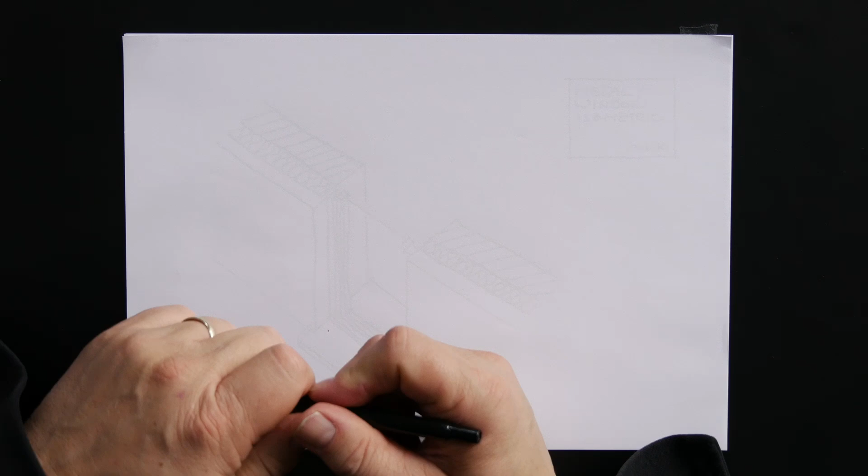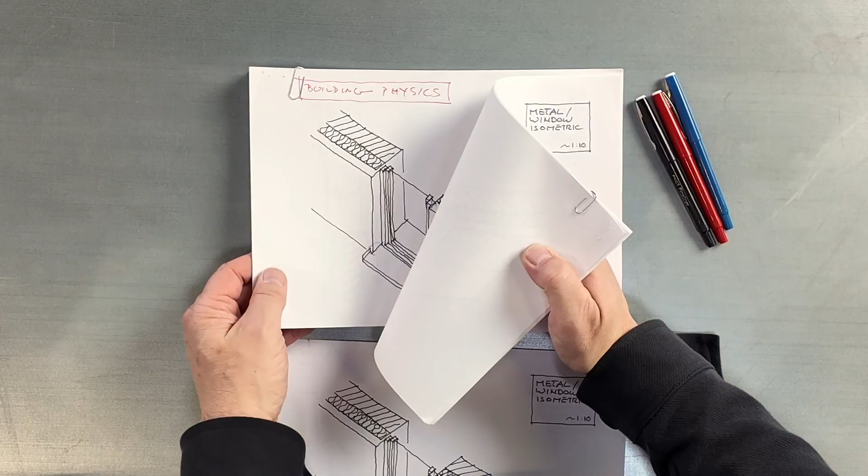So, what do we do now? I talked to all the specialists I wanted to talk to. I talked to a structural design specialist, Ornella in Milano. I talked to a building physics specialist, Enrico, also in Milano. I talked to Jochen for maintenance, and also to Jochen as a construction company boss for construction comments on site construction. And now what do we do with that?

Now I take all this information and feed it into my details to make them the final setup. This is the last feedback in principle. This will become now the final set of drawings, where we have all the impact, the feedback and comments. That's what we then take for someone to go out for tender.

So I just go into it - there was not a lot of comments from Ornella on the structural design. It's actually not that complex. She was okay with the tolerances. That's the different materials which we see, the aluminum system.

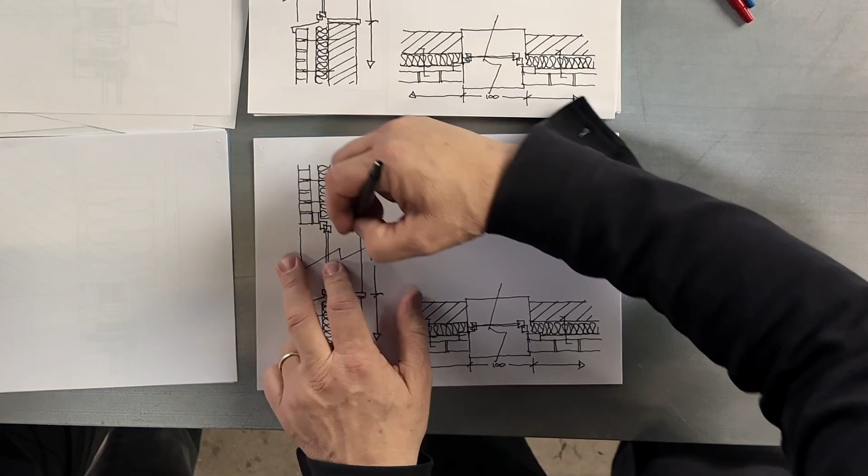Here's something - this is when we come to the brick structure. Here she commented, and she's right: as you're dealing with facades, the brick itself is also a cladding, so that needs somehow to be taken as a load.

Stupid for me, I have made these details several times - as you're a bricklayer, you should have commented. So what you actually have is a metal railing, sort of, on which you place the first layer of stone. It's also a difficult one because with the mortar and the metal it doesn't work well.

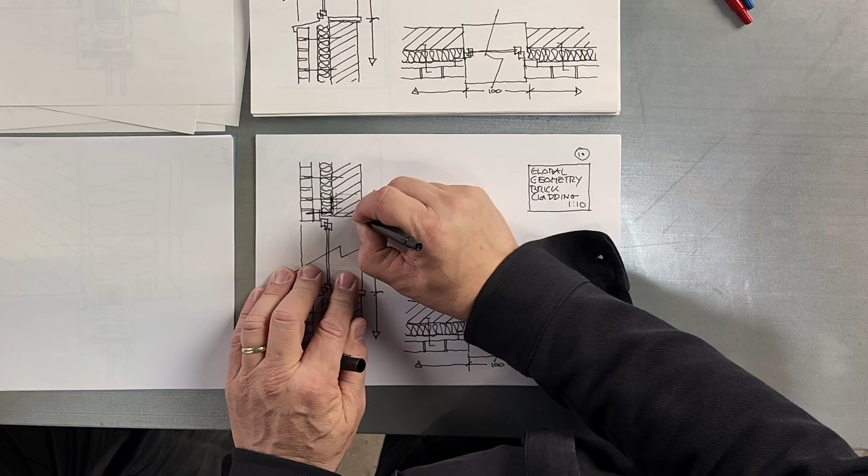If we believe this is brickwork as well, we may need to have some kind of concrete beam here to take the loads. Not part of our facade engineering, but well, she commented on that as a structural engineer. I continue with this - she was okay with this. The number was okay, and no further comments on these settings as well.

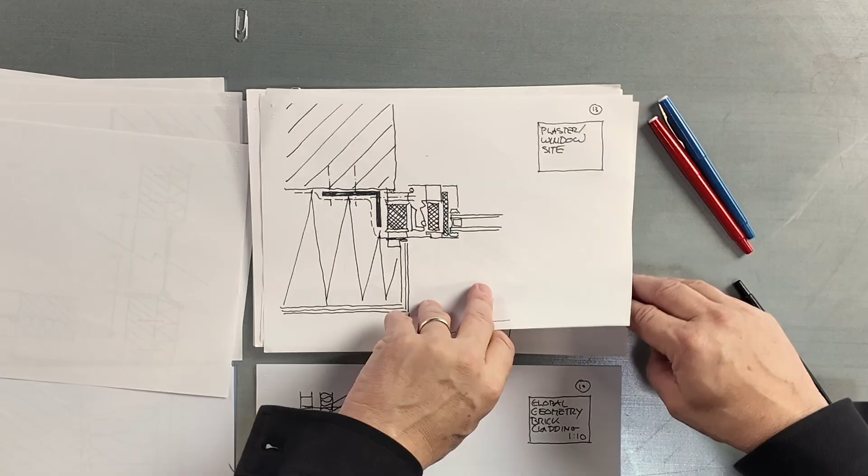That was an easy one for me. Then building physics - Enrico was actually super happy that we do these drawings and that we do this kind of education program, because he really sees that this is a benefit.

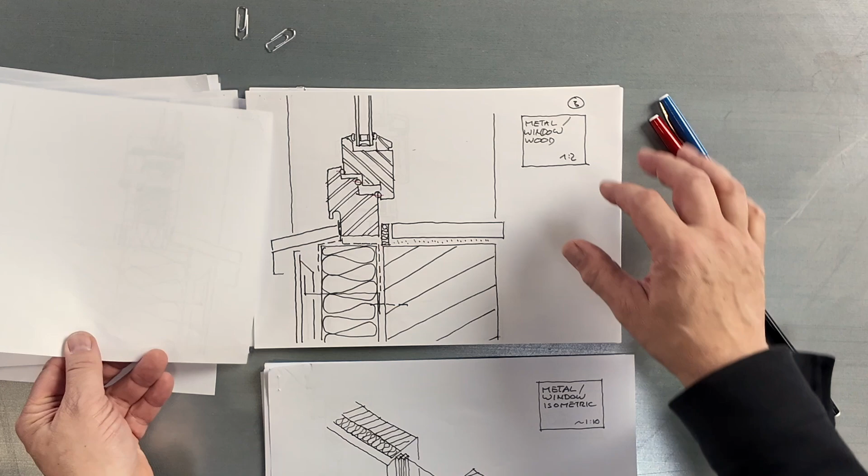When I went with him through all the details, he was evaluating - okay, you have these two gaskets, putting more like sealant, not three layers of gasket. We didn't do anything wrong. No, he was happy with this one, as I say, a pressure cavity which then allows drainage here. That was fine as well. The layer of the line of defenses, all okay.

Tolerances, not only in one but also in the other direction, which was fine for him. And this one, yeah.

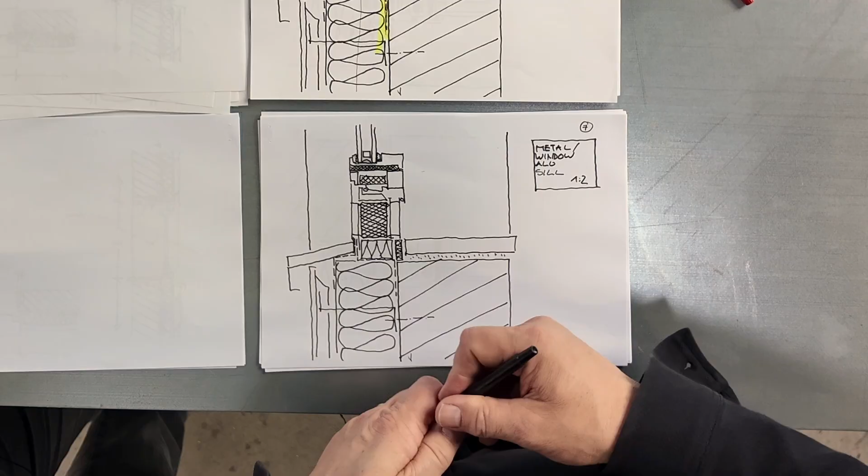Totally wrong - no, looks worse than it ended up being in the discussion. He was happy to have this kind of situation, making sure that we have kind of a cover for the water at the outside, line of defense on the inside as well. He wanted this to be sealed here, so he said you should take care of this. We're going to see a detailed solution later for that, and he wanted to make sure that we close all cavities so that it is closed in that cavity as well.

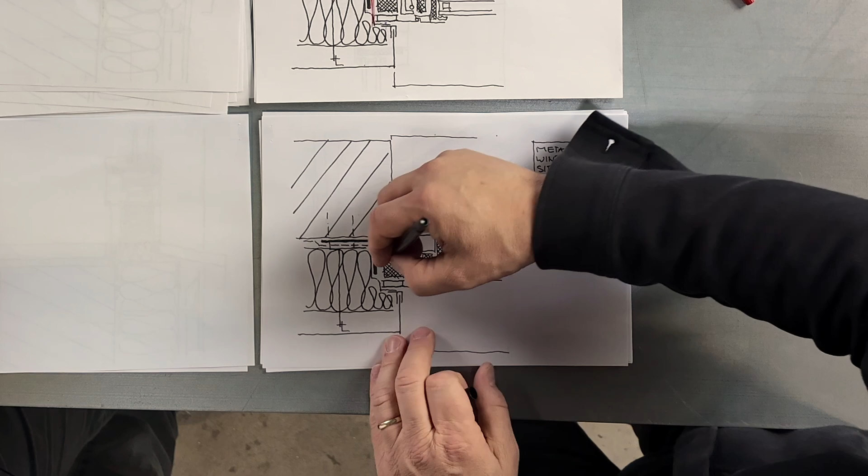That was quite clear from him, and even here - you often intentionally make a little bit more space in between. He was sketching, saying you have to really make sure that this is sealed, so you better draw it in this situation. No miscommunication in this case - it's also fine in here. I understand his point.

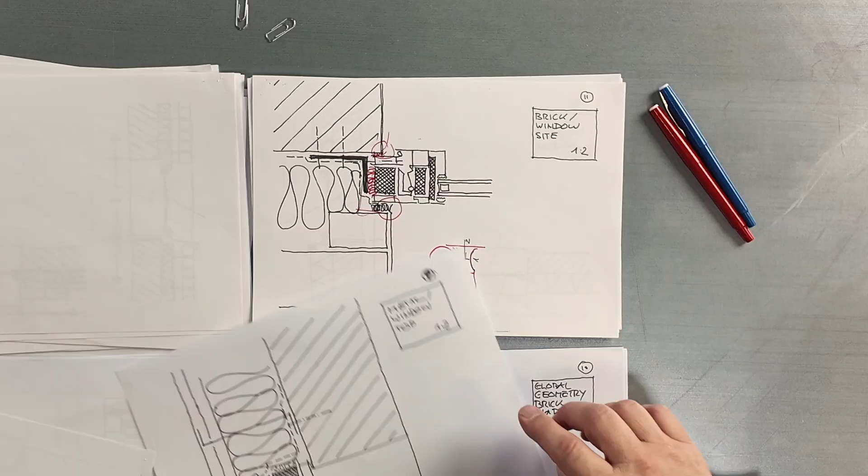Enrico was happy to have that sealant here in this situation, and with the others - this one was an interesting one. Is that the silicon joint? Yes, that's a silicon joint.

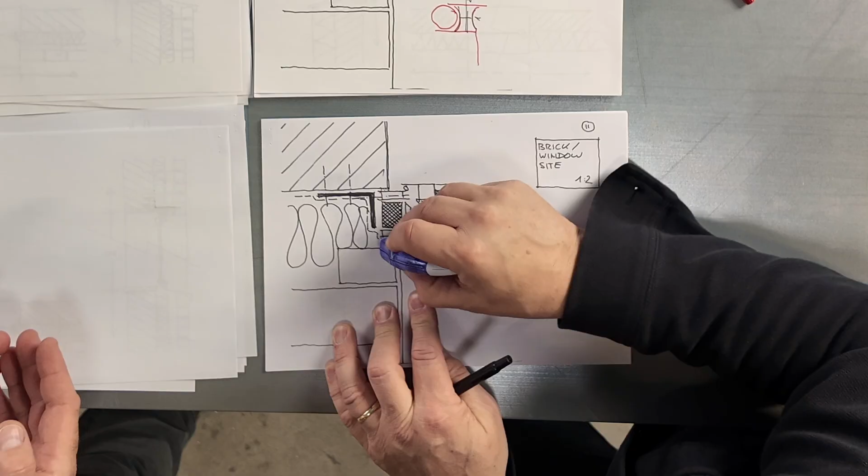Dreiflankenhaftung in Germany - silicon joints are used, or supposed to be used, only moving in one direction. So if the silicon also sticks to the back of the gap, then it can't work properly. So I'm going to draw this silicon cord here, and there's a little foam backing. And by this, I hope we are fine with having this solved.

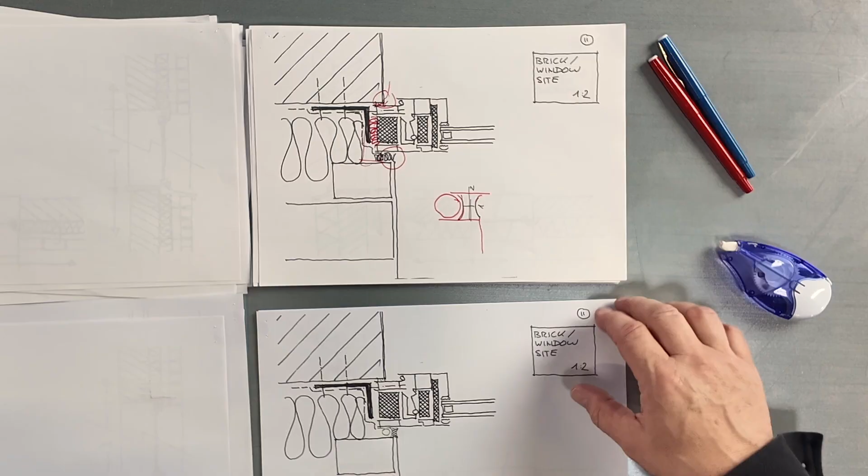That was a good comment. He's right - one part bonds to two parts, so that the silicon itself doesn't create too much stress.

It's also in the description of the silicon bead material that they tell you that you have to do this the right way. This one was mainly a comment: take care if you have these sharp edges that it doesn't get too serious. What I've learned also that usually... Hang on. Let's do that on the proper detail. Okay. Let's do that on the detail here.

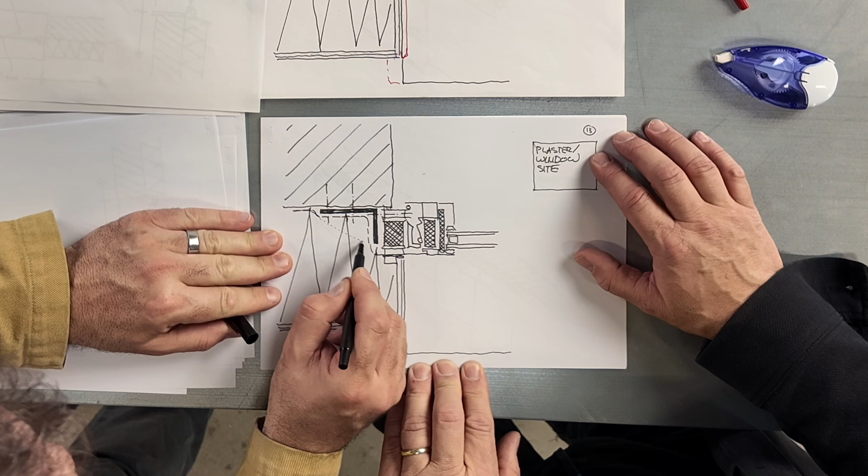What I've learned is that you can also, in order to avoid sharp edges, go in here as a triangle. Then you don't have such a sharp edge. And then you fill that with insulation, put the tape over, and then you just have to cut an angle from the hard insulation. It's easier to maintain or easier to make on the building site. Yeah. That's pretty much it.

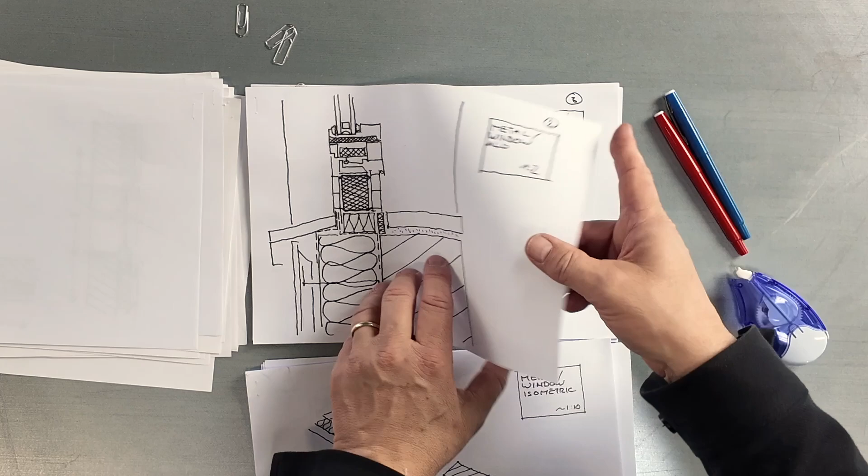Oh, cool. And finally, maintenance. Jochen gave some comments. So maintenance, we can turn back this stack to page number 1 again. No deeper comments at these places, nothing special. We were talking about the alternative solutions for the window material. This is a traditional timber window, and he commented you may also find solutions where this outer layer is done in aluminium. So it's a hybrid aluminium wood window.

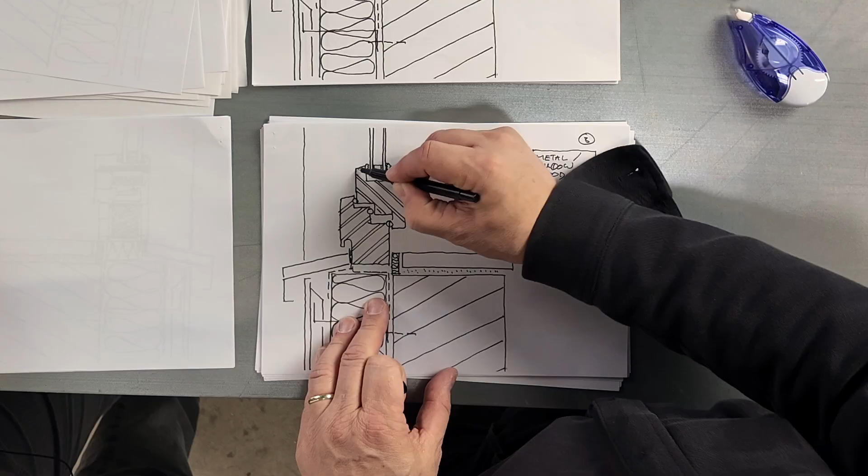Exactly. I'm not going to draw this entirely, but you can assume that this becomes an aluminium profile, and this becomes an aluminium profile, and then you have the outside covered by aluminium and the inside done in timber, which I understand as a solution. I like that because you have the nice look from the interior, where the wood also stays intact very long, and on the outside you save on coatings and painting every 5 years or so. Aluminium lasts much longer. He was fine with that.

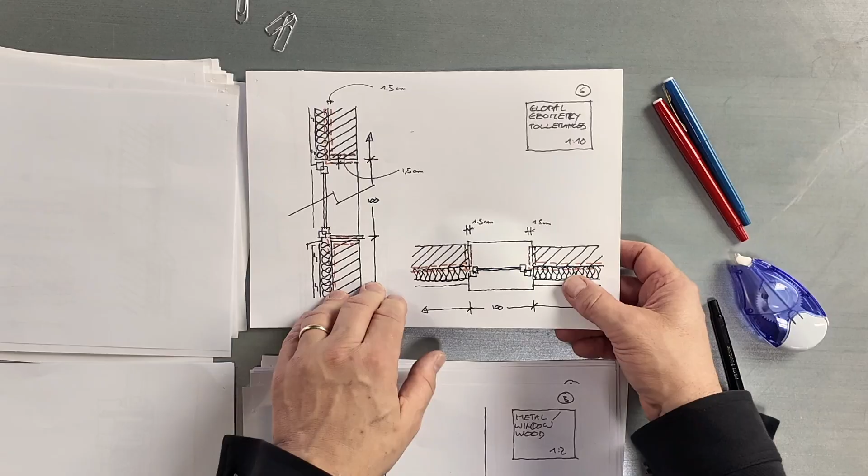He was fine with the 1.5 millimeter tolerances in 2 directions. He had a clear comment on this, and I think he's very right. But we did it right, but yeah, we have to be precise. I think you have mentioned that also. It's easier to see when you look at the facade. Here, precisely, it's drawn like this. But I didn't complete the detail correctly. Yeah, he was really sharp. Well, that's good. He also addressed that this needs to be 2 centimeters, 20 millimeters, by regulation to secure that water drips down in a proper way.

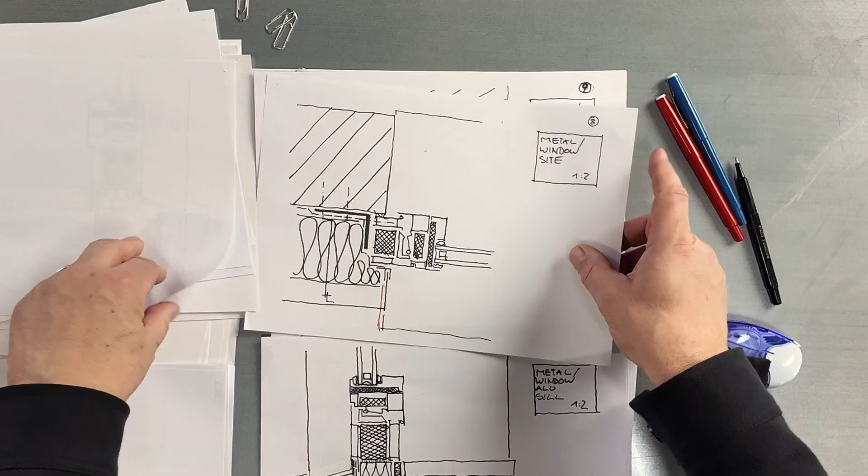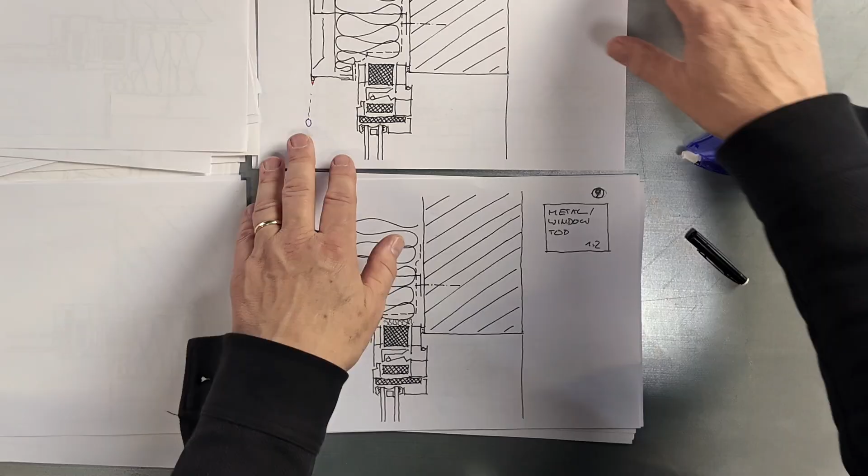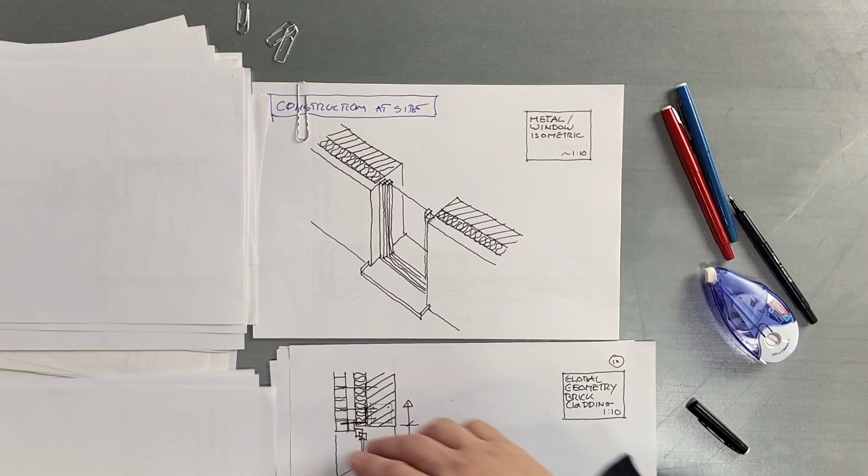This was the horizontal detail. This was the top part. Again, an edge to drop from. There was already one, but he wasn't happy with that because he said this is difficult to make. From his experience as a metal manufacturer, he's able to do sharp edges as an easier setting. This was this direction, then we had this one. All fine, nothing to mention. Brick cladding, nothing to mention. All fine. And that's it. So we go back, and now site construction.

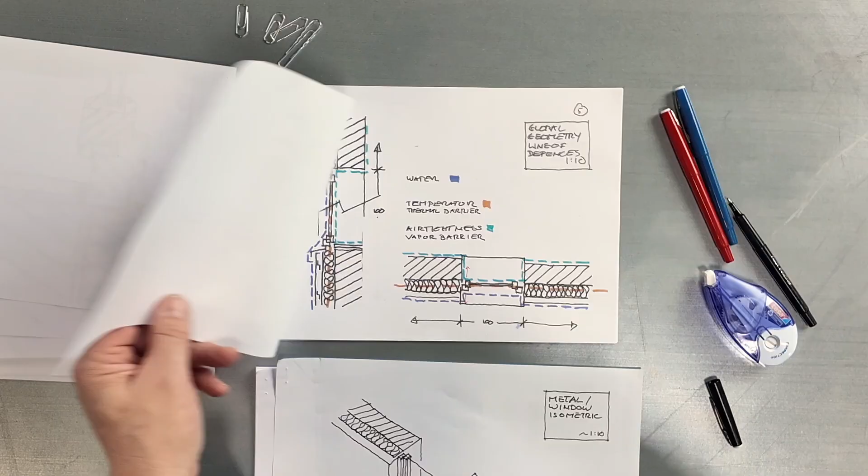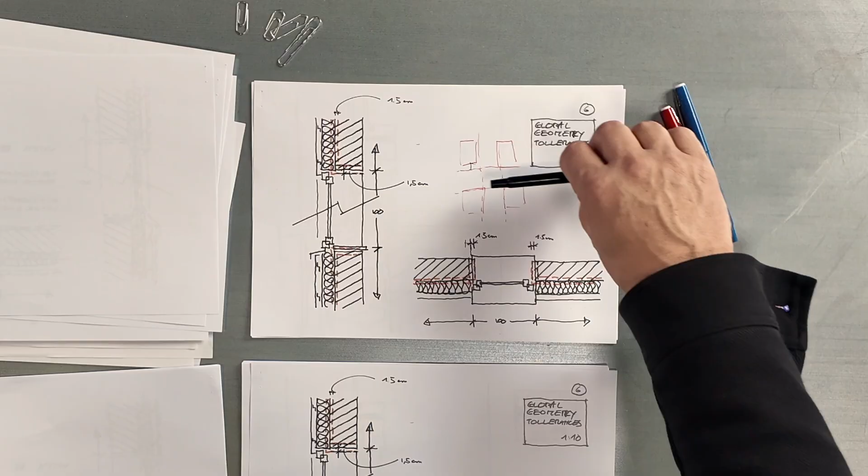Again, Jochen, valuable input. He's the guy who sets facades to the building, who's going to make it. So we start, and he was again fine with that one. We discussed the different types of choices. Again, line of defenses, no comment. This one, tolerances, was an interesting one to discuss with him, because he said for one window in position these tolerances are fine. But if you have a bunch of windows, the grid of the sheet metal needs to be straight, and you have to somehow shift this to keep the lines vertical while still allowing for tolerances. So you don't only deal with one window in tolerancing, but also make sure the layout of the facade is intact.

We're not solving this in this set. We also don't solve some kind of coverage here, outer closing, no sun blinds, nothing like this. It's a simple setting, but this really needs to be taken into consideration. You may end up with smaller windows in order to cover all the tolerances over 6 windows on top of each other, or you have more smaller parts of sheet metal to allow more tolerances in the geometry. That was a clear, interesting comment. I really liked it. He's clearly a professional at that.

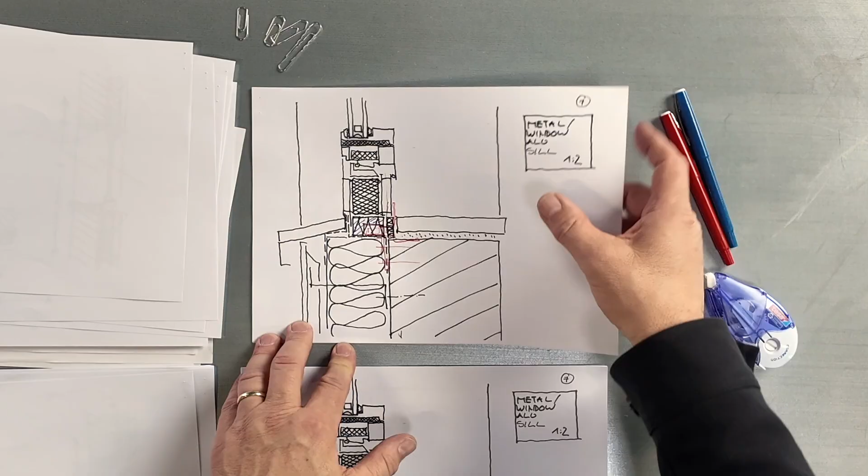And then this one, he wasn't happy with my solution of fixing with the brackets here. In his idea, we should have a bracket here at the bottom to place the window, to just set it there, and then it can already rest while the guys don't have to carry the heavy load of the window anymore. I'm going to draw this now. I hope this lasts.

And we're going to have a metal bracket here. So it's an angle profile steel? Yep, profile steel, which is going to be anchored down to the load-bearing facade. Yes. Just draw one line or two, maybe precisely.

Then he wanted an aluminium profile here. Oh no, this should be steel, I think. This is a square steel tube. You're right, a steel tube. It should be here, yep, which then takes the loads of the window and also allows us to do fixing.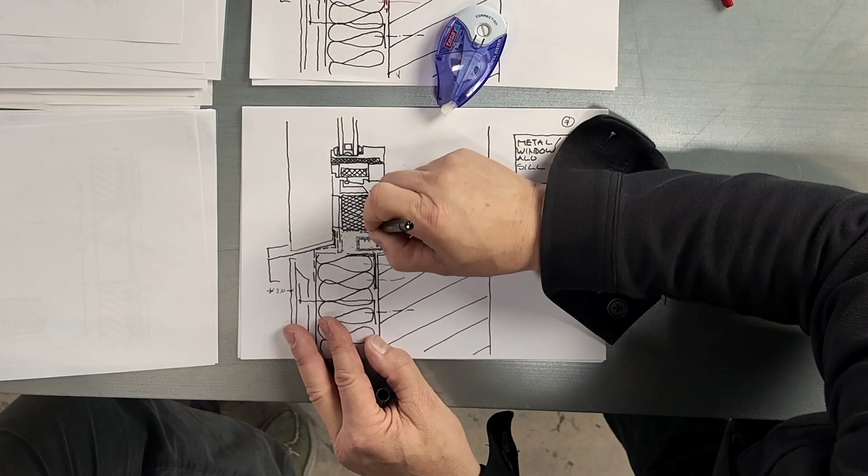Yep. And then he said there should be a plastic profile which covers this. This is in order to avoid a thermal bridge. And that also makes our building physics specialist happy because we close that entire void. Perfect. So that's this detail.

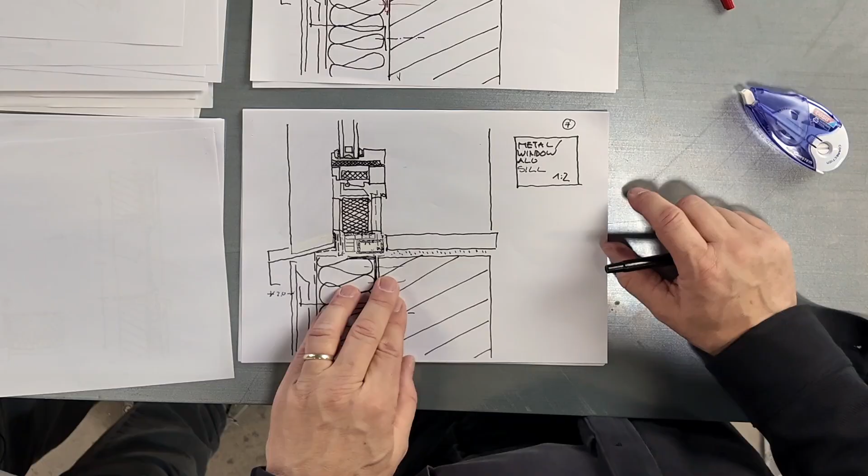What I'm now missing is sealant. So now I took away all the opportunities to seal this. And he said he'd like to have something better which fits here. But that's the air tightness.

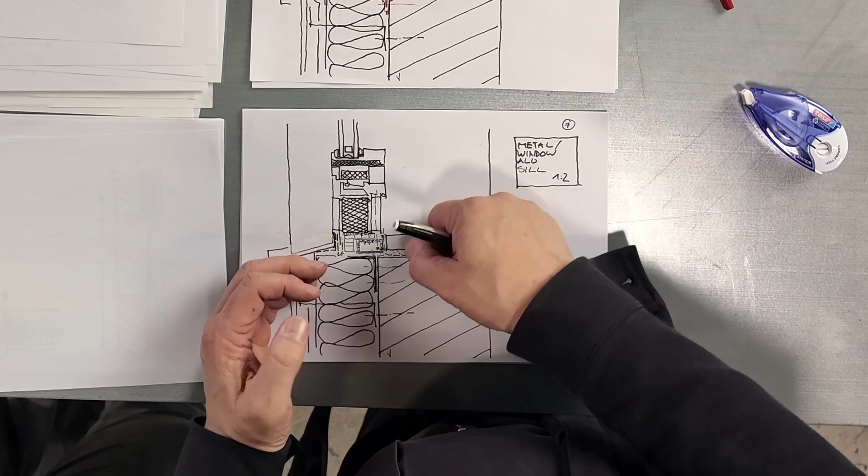Air tightness. And I understand that by order, you position the window, you fix it here. You then place the insulation and you fix it here. It's a bit less complex than also doing all the tightness in here and then putting the insulation. So I understand his point.

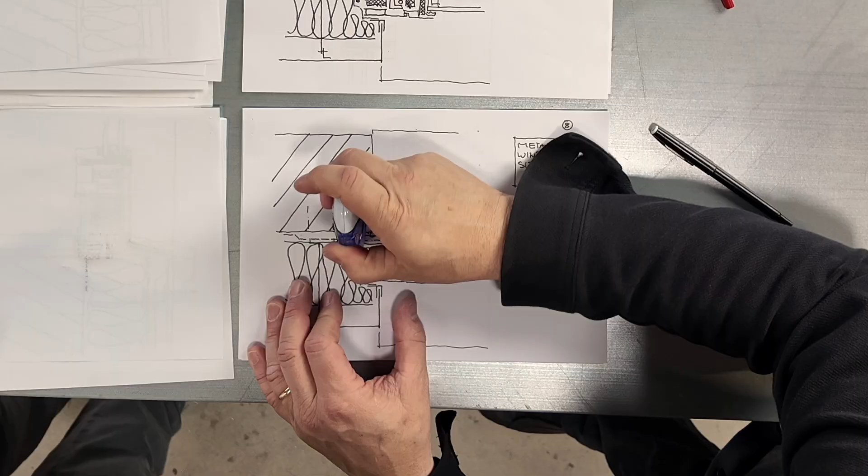I understand this question, but that also means that we have to get rid of this because we don't have that angle anymore. That's the vertical, that's the horizontal section. Horizontal section. So we're only supporting it from the bottom? Yes, but then we also need something on top. Yeah, we're going to see that in a minute. And then he wants it to be fixed here, and we need some cover here. So this is the tape, the sealant, and then we cover it with a strip or something.

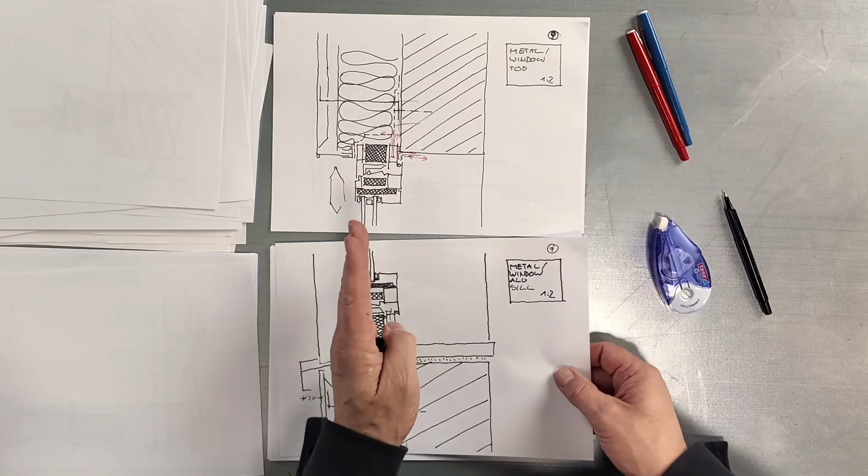Yeah. And then for the top, you're right, because if the window stands like this and it starts to tilt, we need to somehow do something at the top. And if that doesn't happen at the side, we need to do this at the top. Do you have movement in here? So in case the building moves, or is that thermal expansion from the window, for instance?

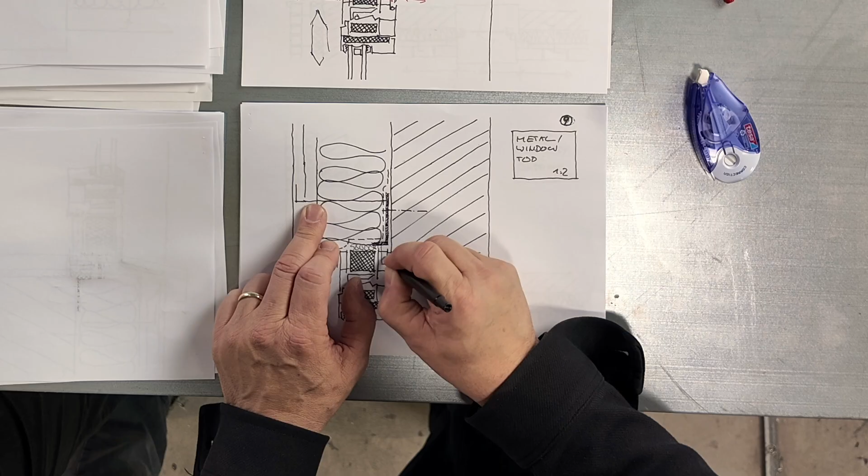Both. I would hope the building is not going to really move a lot, but obviously it can move, and obviously the aluminium isn't solid enough to take that as a load. So we need to make sure that if there's any movement from the building or thermal expansion from the window, this doesn't harm the window, which means we're going to have a sliding part in the cavities of the aluminium system, which then allows the movement here while this stays.

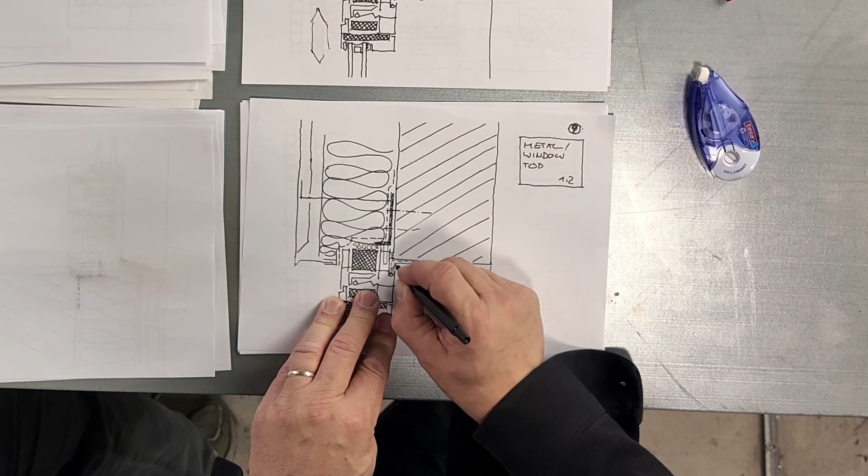So you keep it in place, and then the element is still able to move a little bit up and down. And again, he wanted it to be sealed here, and then a cover or layer of plaster later on. That's actually what happens when you talk to someone who's then on site. They come with their own solution, and you should be open enough for this as the one who's dealing with it.

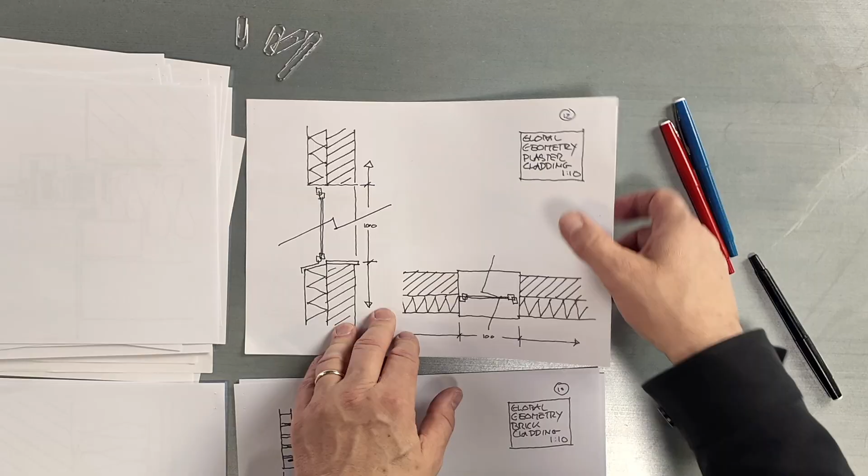Same setting here, same setting here. I'm not changing the detail, but it's exactly the same setting. And then with this one, he was actually quite clear about this detail, this situation. He said you should really take a piece off the shelf from the supplier so that the water tightness in this situation is really given from the plaster, so that you don't get water in the system. And that was mainly it.

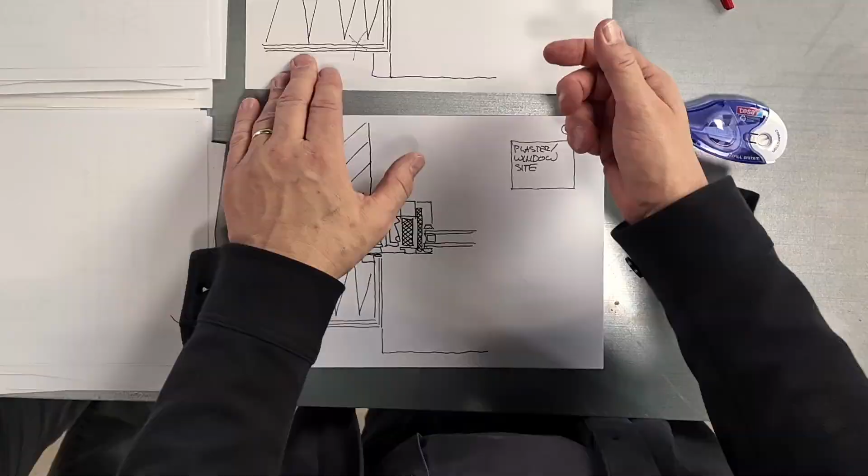Perfect. And now we have a set of drawings which is approved by consultants, approved by engineers, almost a holy set. So of course, we can ask for a tender. Yes, this is now, I would say, finished for a tender process, and then companies like the one from Jochen will give a bid on it and come with a suggestion of how to make it. Good. This is the normal setting.

We may also think of alternatives. In which way? Nah, freeform. Okay, yeah. So let's do that. Okay. Good.